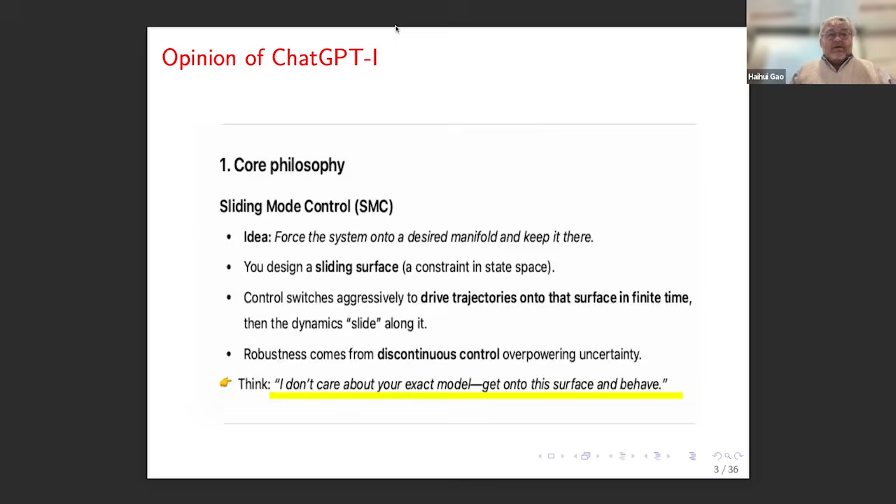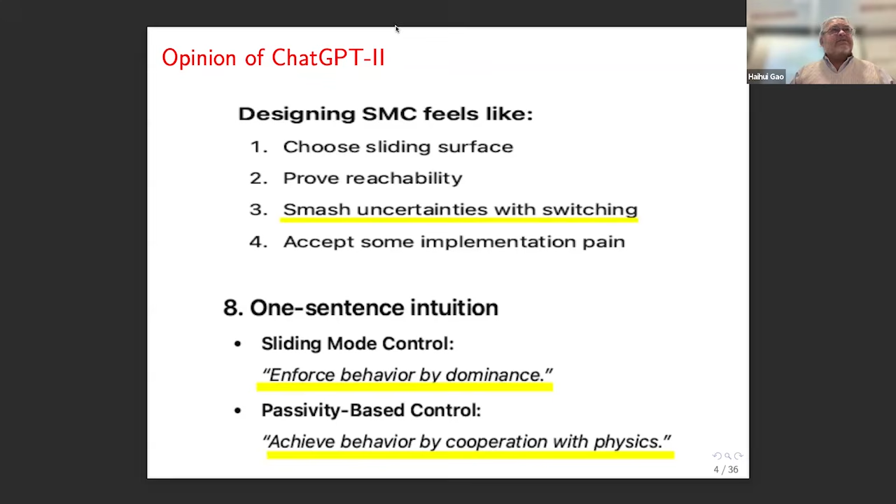I kept on asking ChatGPT—I became completely dependent on it. I like this, put this in yellow: smash uncertainties with switching. That's basically what they do. Then I said, okay, compare with some other strategy. I promise I didn't write the word passivity-based—it was ChatGPT itself who wrote 'passivity-based control' and compared it with sliding mode control. In sliding mode, you enforce the behavior by dominance. In passivity-based control, you achieve the behavior through cooperation with physics. I think this is a fundamental difference.

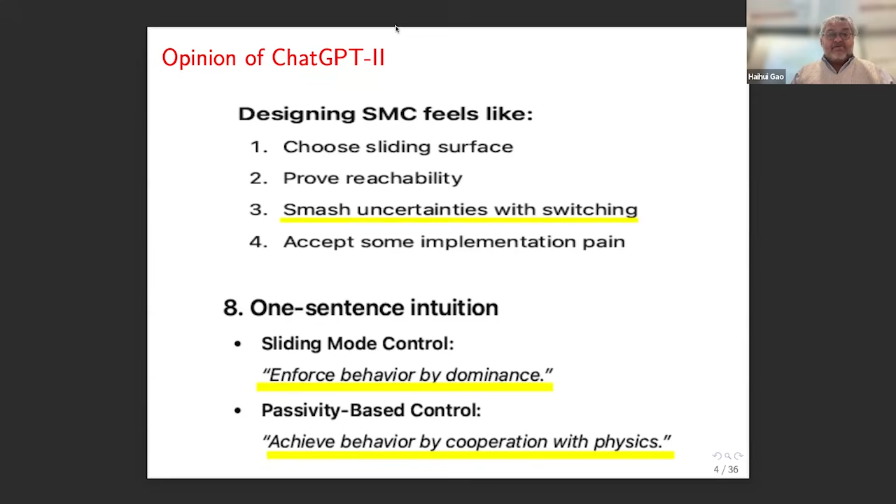Okay, of course you probably know I'm an amateur of passivity-based control, and that's been my field for over 30 years now. I would like, if you allow me, to talk a little bit about my personal experience with sliding mode.

At that time, the other students were trying experimentally to use sliding mode controls on teleoperators. I remember it used to be called the sparking room, because the relays—the technology in the Soviet Union in the 70s, you can imagine it was far from modern—were mechanical relays. You could hear the clacking and the sparking and the chattering, and of course the burning relays. So from my experience, it never worked.

Later I was excited because it was an interesting topic. I joined the Polytechnical Institute in Mexico, and my two first master students—I put them to work on that. I said, okay, let's work on sliding mode control and practical implementations: motor control, thermal processes, and so on. And again, it didn't work. So working with a colleague, my first paper reported that it didn't work, which is number one over there, and the second one was a paper where we claimed to try to reduce chattering. This is my first Automatica paper, from 1984—before either one of you were born.

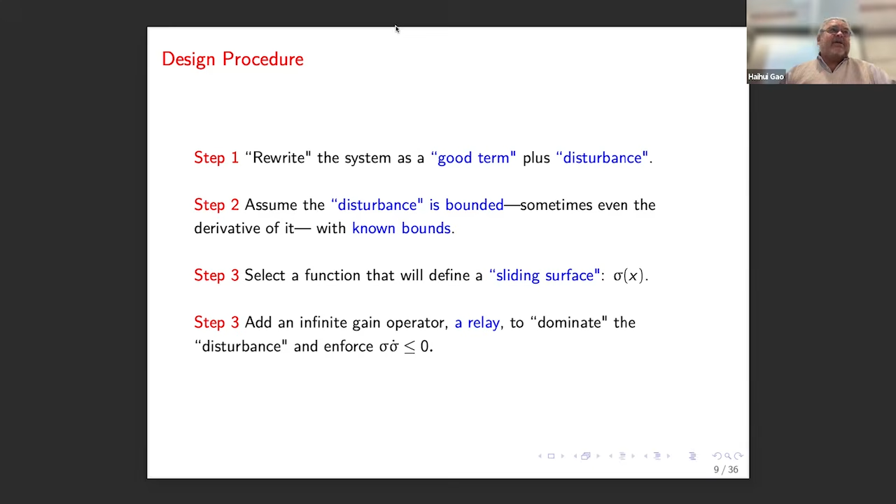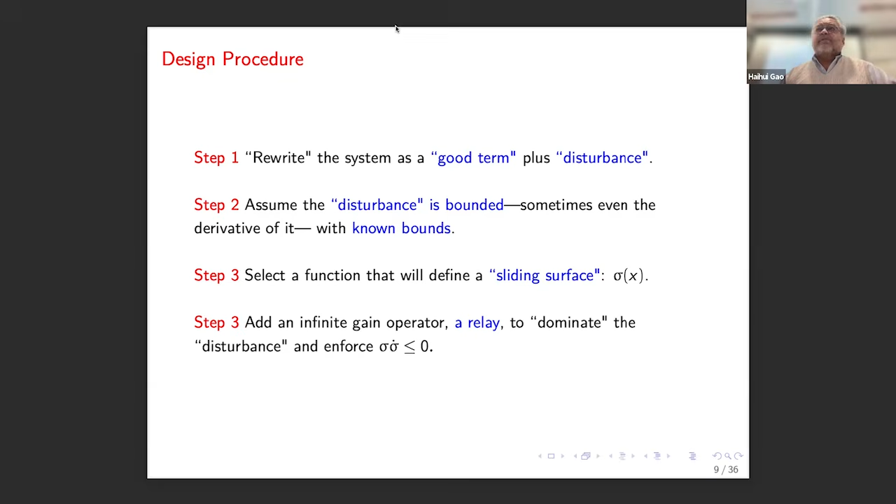It's bounded by some known function that you're going to use in your relay. Then you select, out of the blue, a function sigma of x, which is going to be your sliding surface. Then you add a relay to dominate the disturbance, so you want the gains of the relay as functions of these prior bounds you assume you know, for sigma and sigma dot. This is it - if you look at the papers, this is it. 95% of the papers do this, with different disguises, but it's always the same.

So let me mention some papers. This is an IFAC-PapersOnLine, a tutorial paper called Survey On... They start by writing this equation in the normal form. Isidori himself says it's very, very difficult to transform a system into normal form - you have to solve PDEs and so on. But let's assume you manage to put it in normal form, with zero dynamics, and then these guys...

And these guys - I may be blocking, no? - go and assume that this B is bounded from below and above, of course larger than 0, that this A is bounded, and you know these numbers, K, M, and C. Then they dare to say things like, this is the global version, it is hard to be satisfied. Of course it has to be satisfied, but it's reasonable in a compact set, because they say we're working with physical systems, so it's compact - all the variables are bounded. But then when you look at their simulations, they never put the bounds.

They never put the bounds.

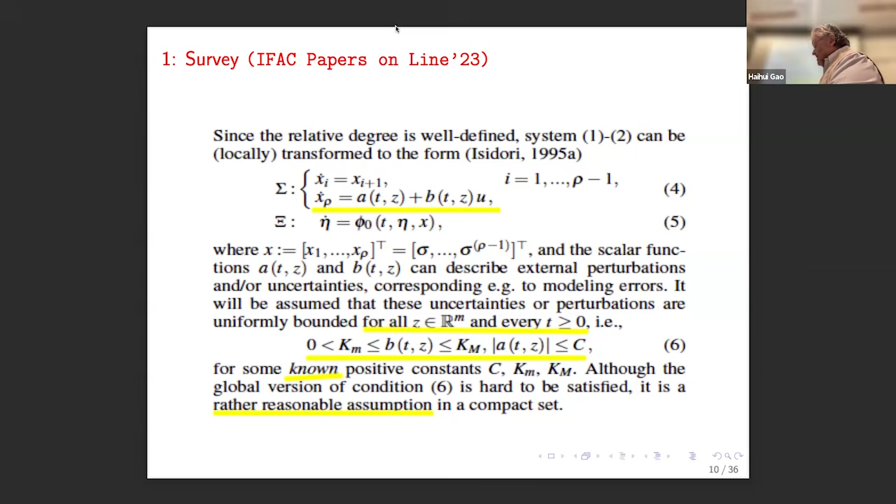So they say it's bounded by assumption, and that's it. And if you look, I had a student who repeated some of the simulations. The states go to 10 to the power 25, so it's bounded, but to 10 to the 25. So that's usually the scenario.

This is another one from International Journal of Robust and Nonlinear Control. Again, pulling out the nice part, minimum phase and so on. Then this guy has a KP here and a D, and you want to assume that T is bounded by known functions, and the KP is bounded also, and the D is bounded. And you use these three functions in your analysis.

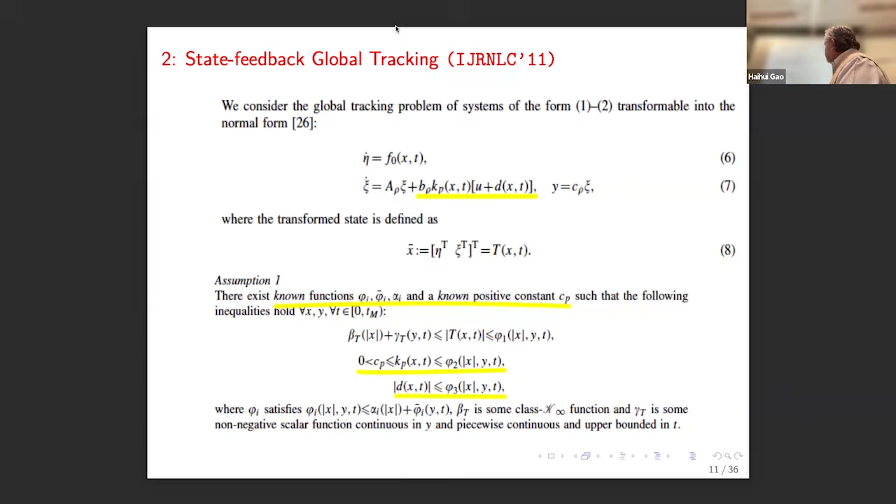So I wonder, where do I get these systems that have these nice properties? Then they dare to try to apply this to physical systems. And for instance, in mechanical systems, this is a Transactions paper from 2022, so it's quite recent.

But one of the critical assumptions is that the gravity function here is zero only at zero. So this means that any mechanical system which has rotating angles is not qualified, and the only equilibrium that you can stabilize is this equilibrium.

And the example they have, literally, is a hanging pendulum. So you want to place a pendulum in this position, and you want to design a controller to put it in this position. You could just drop it, and it would go there automatically. But this is it. This is it.

And then they make another strange assumption: there's a partition of the inertia matrix in this form. These are the unactuated coordinates, and this block is constant. We proved, in our book on PID, passivity-based control, that if you have this assumption, the robot can be controlled with a PID, a globally convergent PID, just with this assumption. So this is, sorry to say, but this is quite ridiculous.

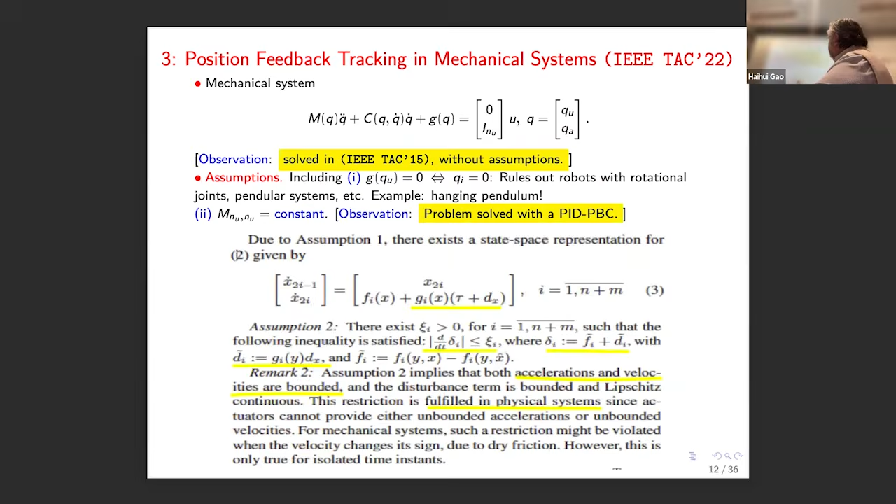The problem: you have a Hamiltonian system. Okay, let me go back — classically, the port-Hamiltonian form, sorry, I'm pushing the wrong button. Written in port-Hamiltonian form, classical. You again extract the nasty guys, these are going to be nice — you'll see in a minute. And then you define the trajectory.

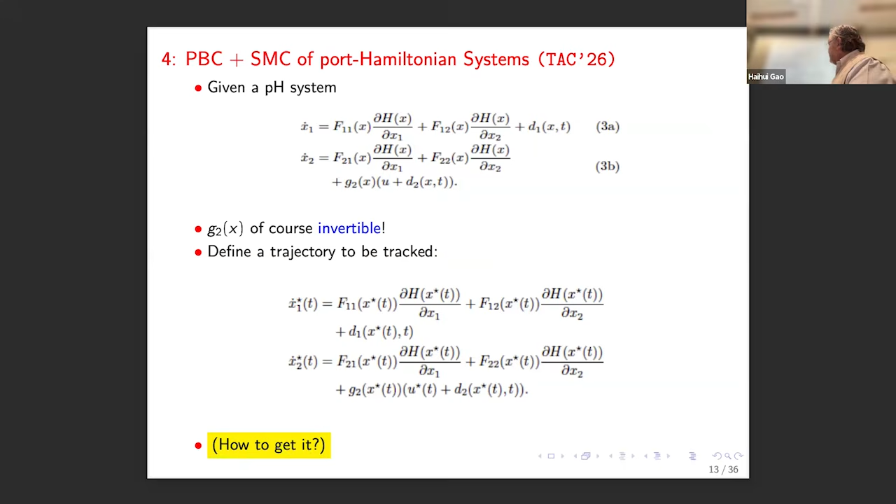This problem, we show, is mathematically untractable. If I give you a nonlinear system and you want to find the trajectory and compute the U star that will achieve this trajectory, this is an inverse problem, very well known in mathematics, that is in general not solvable — even for very simple dynamical systems. So for this system, I really wonder where they're going to get the U star and X star. But let's say that they got it.

Okay, they got this U star and X star, and then they write it again in a nice guise with some disturbances. They define the surface out of the blue. After several impenetrable assumptions, they say let's define sigma in this form. This sigma has a nice property: it's the sum of two functions whose bounds I know. I know the bounds of this function, this phi, I know the phi bar, the gamma, I know the gamma bar. So, I'm sorry to say, this is quite ridiculous.

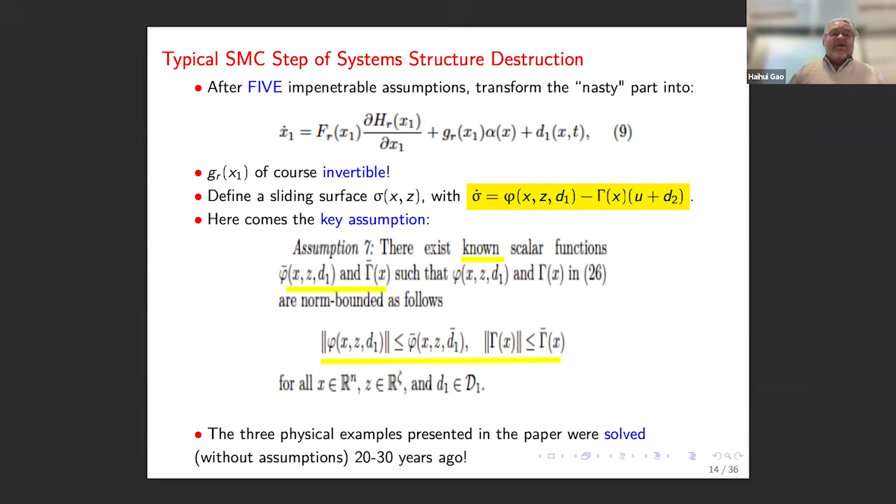And then they have three physical examples: a levitated ball, and tanks, control of tanks, which are trivial examples that we solved 20, 30 years ago without assumptions. So this is the material that you see in the literature, and we're talking about the regular paper in Transactions 26. So it's really very, very sad.

Okay, I'm a little bit uncomfortable here.

Okay, now, of course, you never see the inputs in sliding mode control. And there's a very good reason for it, because if you take a very simple example, a double integrator...

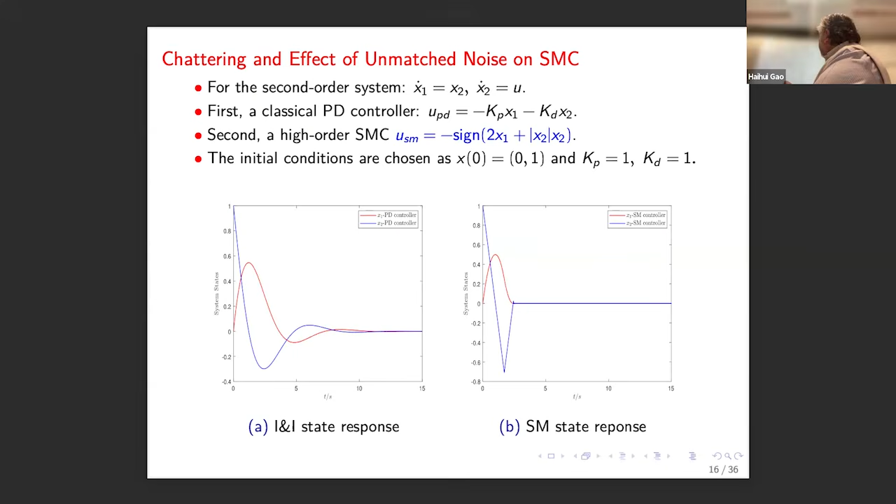And you put one of these sophisticated schemes, this is called a high order sliding mode. Well, you see the behavior of the trajectories of X2. Okay, it's an output feedback control, and of course the sliding mode is like that, very well. And you look at the input, this is the input even without noise.

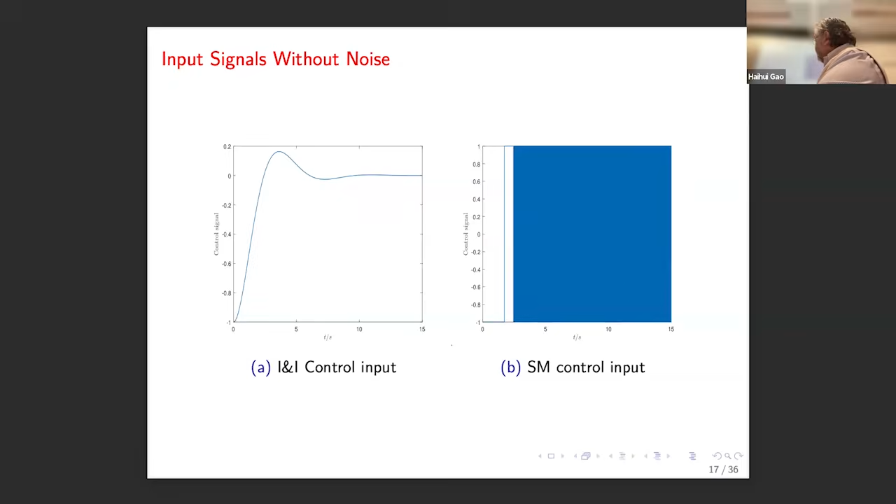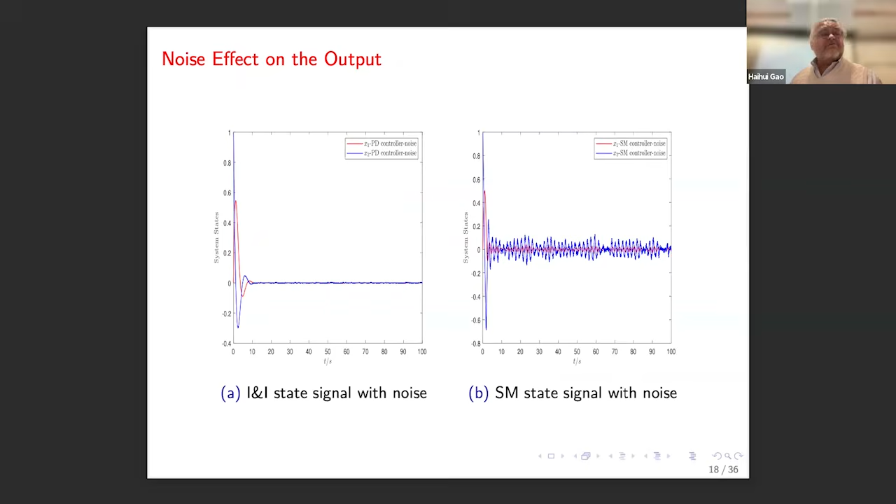Let me show you some experiments. We did some work with colleagues from the north of Mexico, a town called Torreon. They have a very good lab on robotics. And I proposed to them, let's take the simplest robotic system you have, which is just a pendulum, and let's try to apply sliding mode control and see what happens.

And then compare with another controller, this immersion and invariance controller that we developed several years ago. So it's a simple mechanical system with friction and this output feedback, so you only measure position, you don't measure velocity.

Okay, so this is the system. You see, this is the dynamics, this is the model of the friction and the mechanical part with the gravity force and so on. And you assume the parameters are unknown, but you only measure Q, you don't measure Q dot.

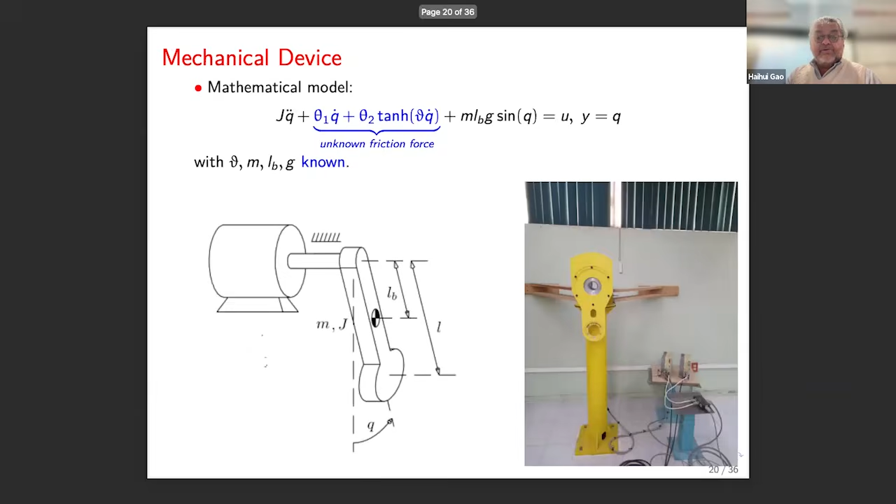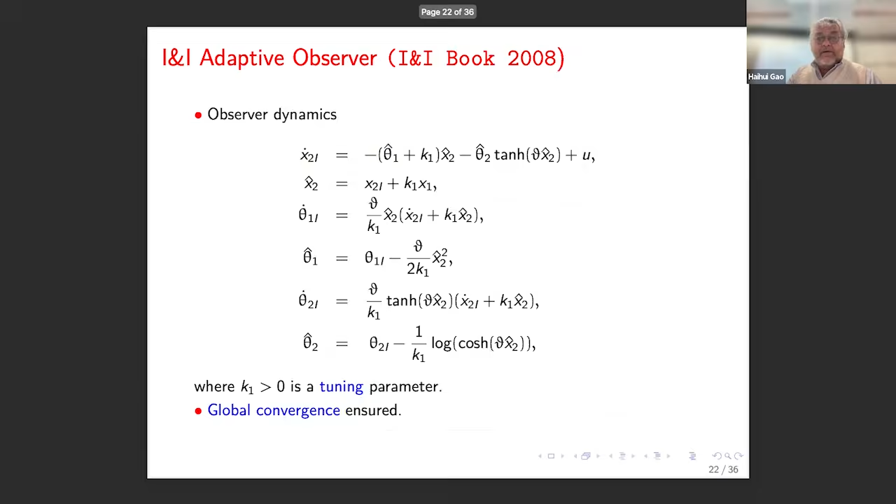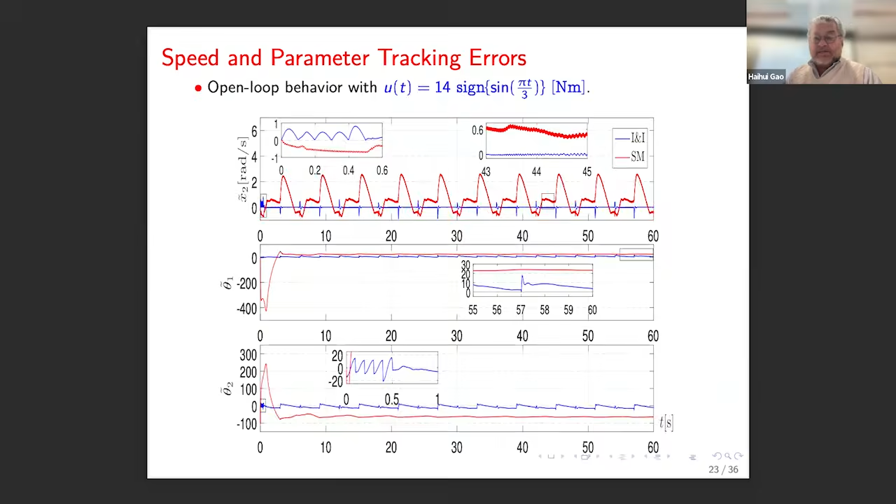If you let it run, they will diverge, and we'll see in a minute that actually this happens. This is all experimental data. This is the behavior of the speed and its estimate. Again, red is sliding mode, blue is not exactly zero, this is a physical system, there's a mistake.

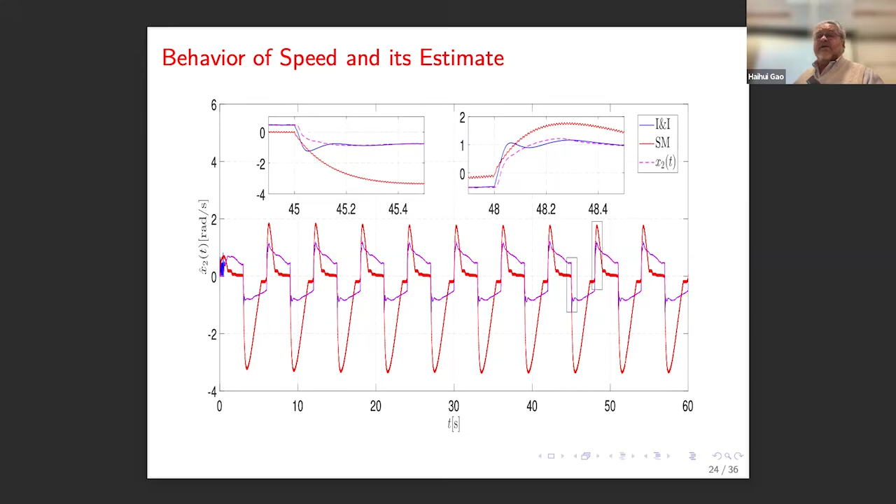But if you compare the size of the transients, it's really overwhelmingly superior. Okay, now we put a controller; this was just the observer.

Then we put a controller, which is a very simple controller that transforms the system into a chain of integrators with some gains. This is the full information control. It cancels the nonlinearities and so on, and the certainty equivalent control.

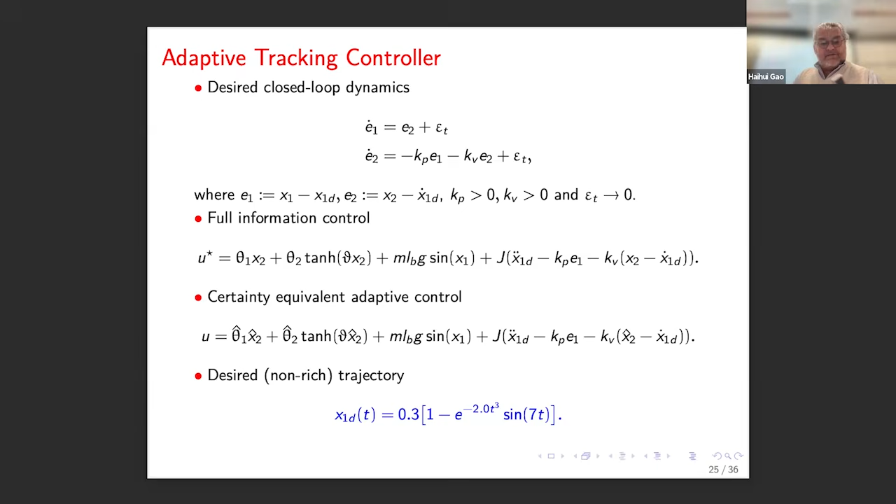Then we tried the desired trajectory, which is this exponential. It's a non-rich trajectory, so it does not satisfy the persistence of excitation assumption, so it does not fit into the theory. But we wanted to see what the behavior was. Well, you see the behavior.

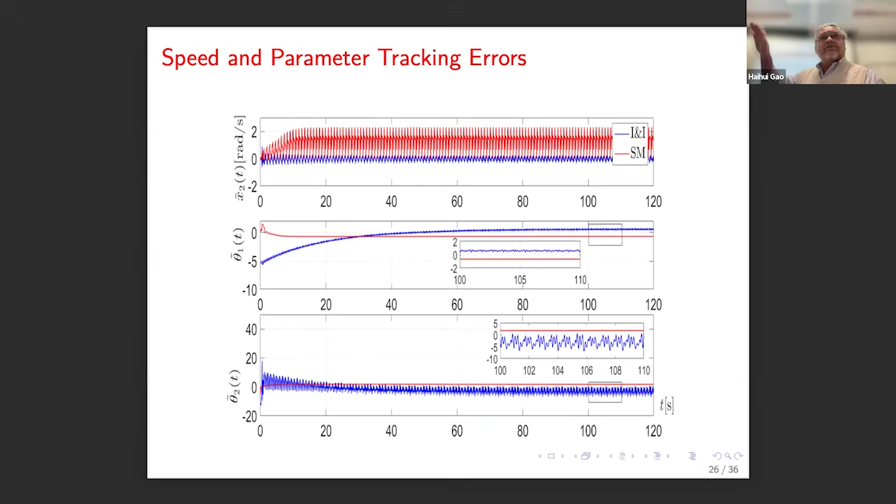This is the sliding mode, this is the I&I, and then this diverges. This simply goes to infinity. So this is experimental evidence. We didn't tinker too much with the data, but that's what we saw. It took the student a few weeks to get this working.

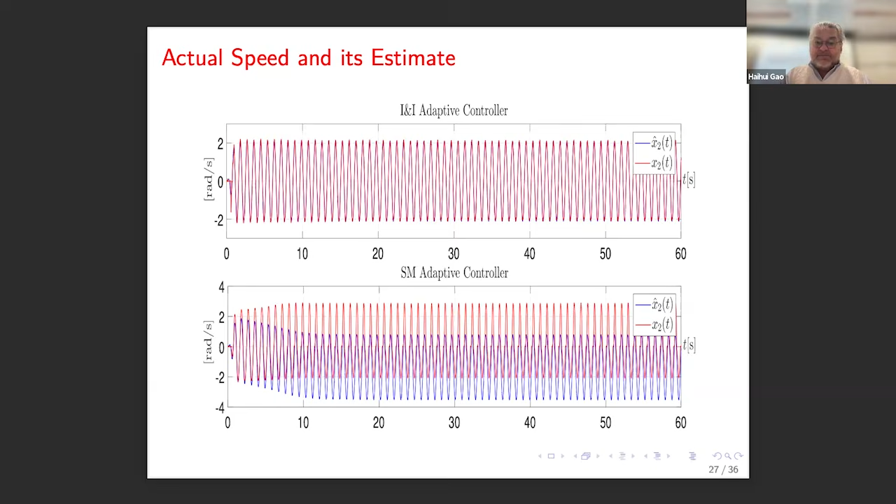You compare here the X2 for the sliding mode control and for the I&I control. It glues, it literally follows the speed very well, and position tracking errors too. And the control signals, of course, the control signals in the sliding mode are full of noise, as expected.

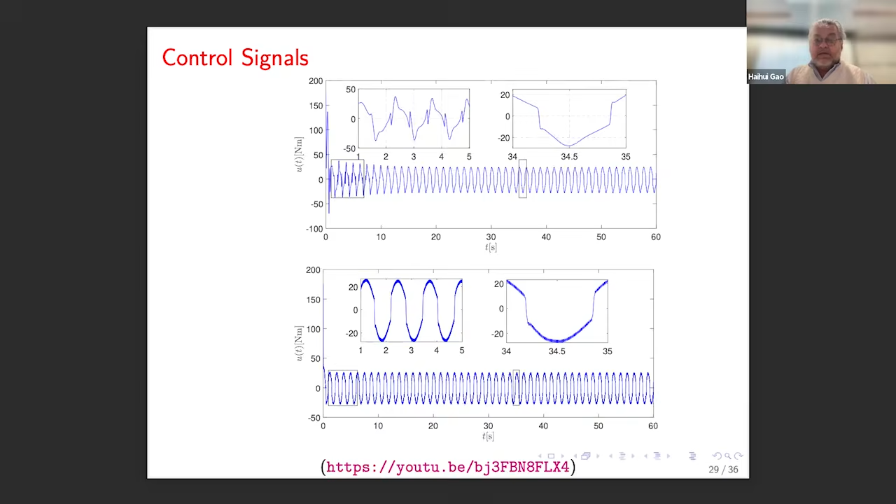Okay, let me skip this. I think I have time. There is a book, a recent book, and an IFAC survey paper published in '23, a few years ago.

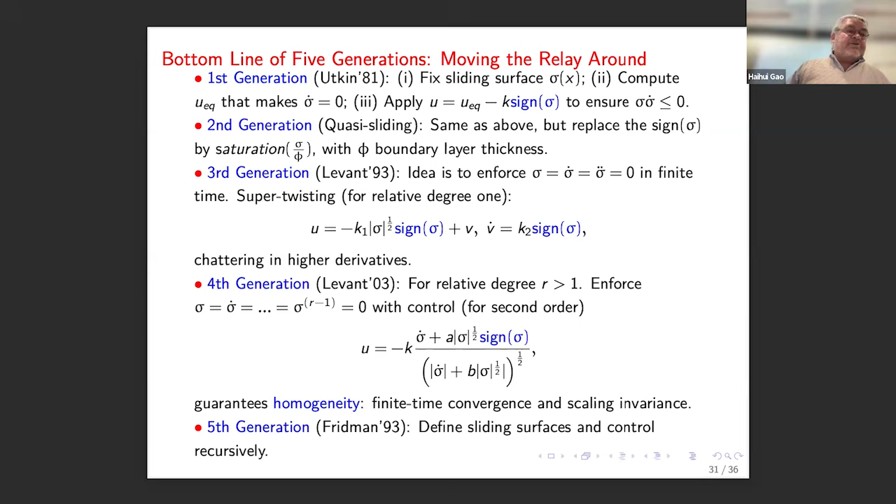The fourth generation now is more clever because now you add more integrators. You make sigma, sigma dot, and so on and so forth, to be attractive. This leads to this kind of controller, where again you have this signum, and now you have these complicated expressions. Again, these fractional power functions grow to infinity at 0. So they add to the problem of injection of high gain.

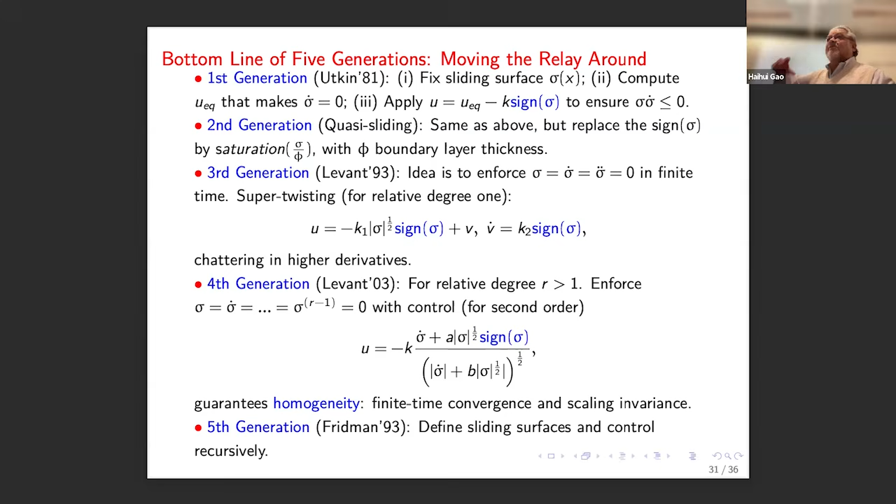Okay, so that's it. And the fifth generation, I didn't have patience to go through it. It's just a kind of recursive application of this — first this one, the second one, and so on, and then they recursively apply this. So these are the 5 generations. And as I said up here, it's just moving the relay around — the relay from here to here, add an integrator, put the relay someplace else.

Okay, now let me talk briefly. I'm actually going very well on time — 45 minutes, huh? Yeah, let me talk about current engineering practice.

I have been working with the supervisor of Professor Choi here with motor control. I work with people from power electronics at the University of Colorado, Denver, with people in power systems at Northeastern University, George Burgess — people who know the field and are actually applied researchers. They work on that field, and what we did is collaborate with them.

My students used to spend, Bowen didn't do that, but all the other ones used to have two supervisors — one supervisor in applications and myself. They would spend one month, six months, up to a year in the institution where the other supervisor worked, and did experiments over there. This was done with Boston University, Virginia Tech, and even some French institutions. So that's my experience. Let me talk about current engineering practice.

Now, I think you have a robotics group here. In robotics, the dominant technique to regulate the position of robots is the so-called Takegaki-Arimoto PD controller. It's a PD controller that exploits the passivity of the robot from torque to velocity — a physical property that's been exploited for the design of this controller.

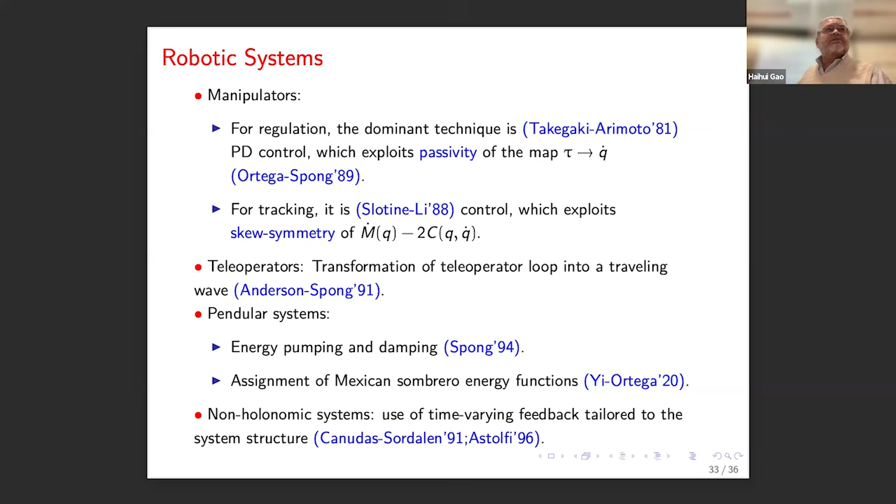In motors, I'm afraid to talk about motors in front of this expert here. In electrical motors, the dominant technology is called field-oriented control. I think in induction motors it's the dominant technology. And again, it's a technique based on exploiting the relationship between flux and voltage in a rotating frame, trying to put them in phase and synchronize the flux and the voltage. So again, it's really exploiting the physical structure of the system.

And we proved that it's equivalent to passive systems, the passive system interconnection. So again, we have a physically motivated strategy.

And finally, in power converters, the industry standard is something introduced by a Japanese researcher, again not a mathematician, Akagi. It's called instantaneous PQ control. And we proved recently again that it exploits a property of passivity, but a different property of passivity, called shifted passivity.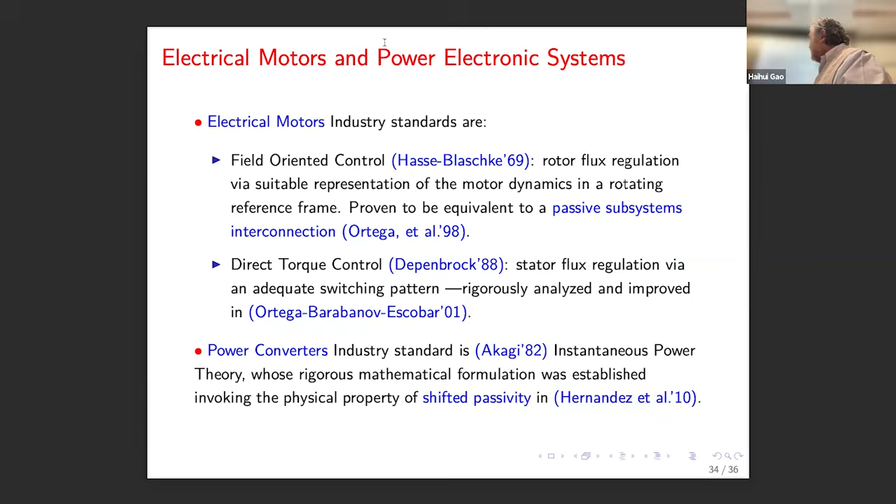Finally, in power systems, the original turbine governor control of synchronous systems led to what is called droop control, which is again based on a physical property, the relationship between frequency and power. Recently, in a very interesting series of papers, George Weiss introduced the idea that with the inclusion of more and more power electronics in power systems, the previously existent rotary inertia disappeared. So they call that now inertia-free or inertia-less systems.

This inertia was important because when you had lower demand than the offer of energy, you could store the energy in a rotating device. The rotor would behave like an accumulator, storing energy. But now you don't have that. So what do you do with the excess of energy?

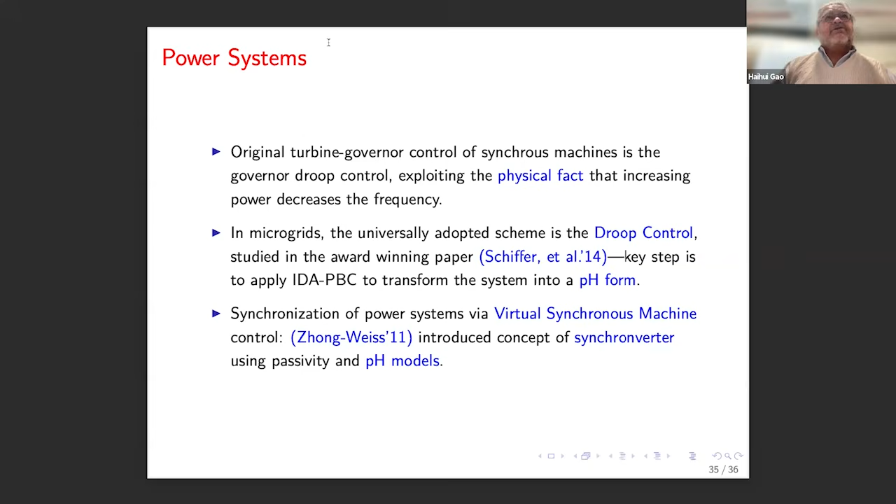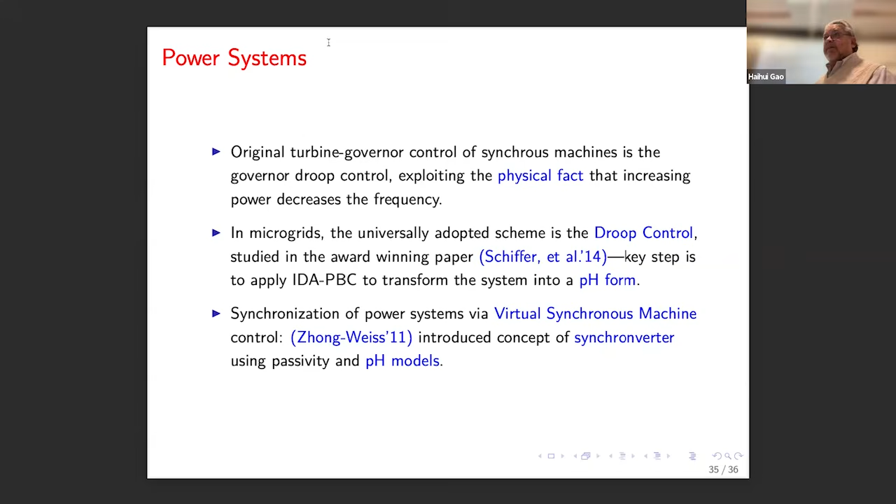So the idea of George Weiss is to emulate a rotor via control of the converters, and he called this, it has a name, synchronverter. So all these strategies, why am I bringing all these? Because all of these exploit the physical structure of the system, and they are the existing dominating engineering strategy.

So these are my concluding remarks. Given that engineering practice is dominated by control schemes that preserve and exploit the physical structure, what is the interest in studying schemes whose first basic step is to destroy the structure? You're contradicting engineering practice when you do that.

And more dangerous is the fact that we're training a new generation of engineers with a technique that doesn't have an impact. In my case, I'm personally concerned because we were looking at statistics the other day: 60 to 70% of all PhD theses in Mexico in the last 10 years have been on sliding mode control. So the whole generation of engineers is being trained to do this.

And this, for a country like Mexico, is catastrophic, because these guys, what are they going to do? They're going to keep on publishing papers and they will never join engineering practice, or have an impact on engineering practice. And this for me is very important.

Scientific publications. I had a series of exchanges of emails with the three former editors-in-chief of the three most important journals: Miroslav Krstic, Alessandro Astolfi, and Andy Teel. We had a chatting group, in some sense, 4 or 5 exchanges of emails that I started. I said, we have to control this. There are just too many papers on this topic of very low quality, because there are a lot of reviewers from this field.

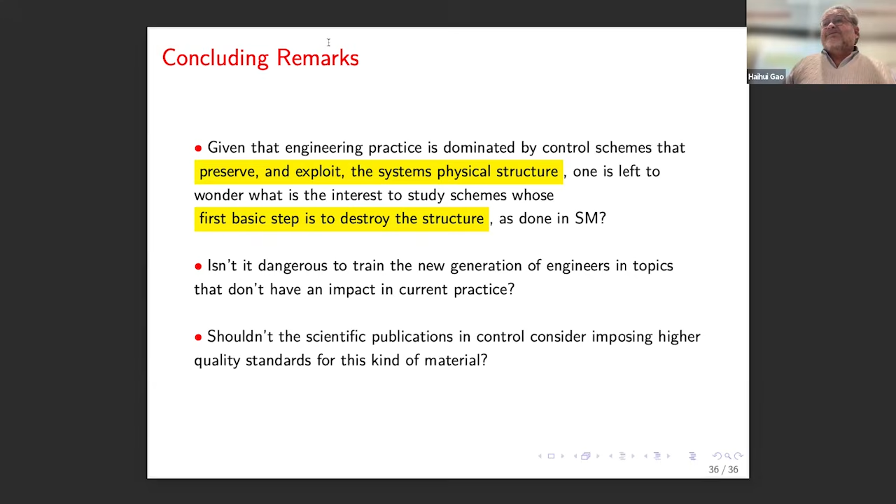So that's the end of my story.